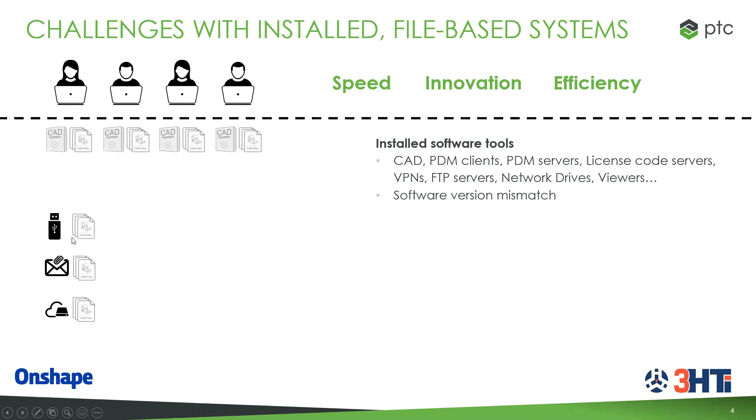So let's talk about these copies of files for a little bit. How do people try to conduct concurrent engineering and concurrent design when working with files? So what they'll do is they'll email files back and forth. They'll use a system like OneDrive or Google Drive or Dropbox to share these files, which is pretty easy, but still there are only copies of files. Only one person at a time can work with these. And they're locked as soon as somebody tries to open the document.

Or with Dropbox, as I've seen, you can end up with a conflicted copy. So you have copies of files and it's uncertain as to which one's the right one. So how do companies deal with this? Well, one of the ways they deal with it is they invest in local file servers. Or they'll invest in a PDM system or a PLM system to manage the rate of change and protect the files from being overwritten improperly. And they'll build in workflows. But what's interesting is that this can create even more copies of files.

So for example, PLM systems can use a check-in and check-out method. And when you check a file out, it is downloaded and copied to your local desktop where you can work on it. But the file in the PLM system is locked in the cloud. Nobody can access it or even view it until you check it back in. But when you check that file back in, you are still going to keep a copy on your computer. Most likely it's going to be in your downloaded files.

And you need to keep that in mind because, say, in 2 weeks or a week or whenever, you have to access that file again and you bring it in to your computer to make changes, you don't want to make the mistake and update the wrong file if somebody else has worked on it. So that can create an issue.

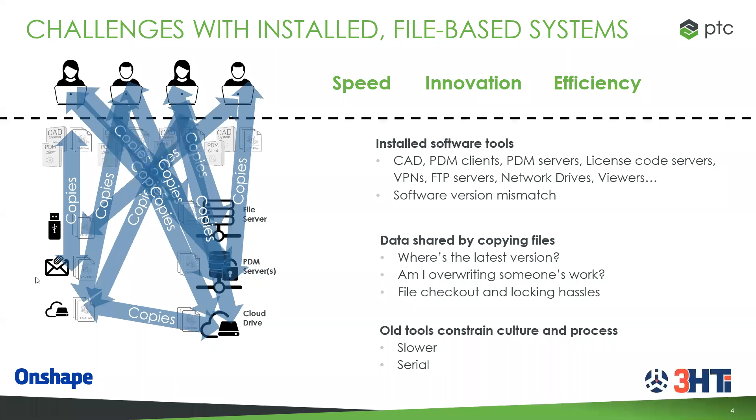The longer it takes for everyone to get the files to the third engineer or the last engineer, not only can that delay the deadline, but if there's an issue, it's going to go all the way back to the beginning, and the file or the product is going to need to be modified, and any change in that process is going to be costly, not just because of additional engineering hours, but lost revenue costs associated with missing deadlines or delays in getting your product out the door. And this metric is called cost of change.

There's another metric called cost of delay, and in that metric, what will happen is you'll find problems later in the design process, and that happens when deadlines are missed and products are delivered late.

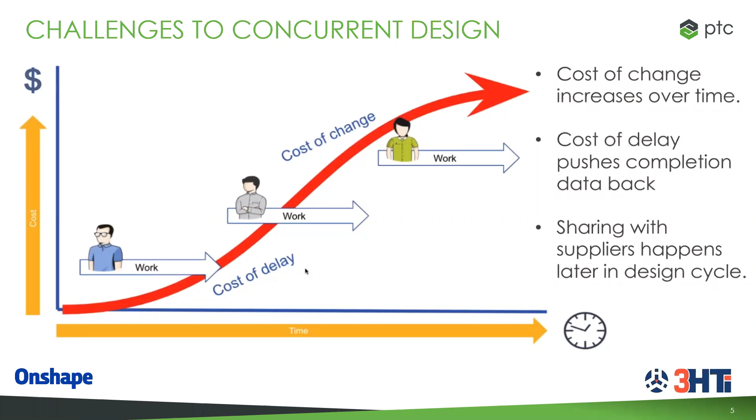The way that Onshape is architected, you'll see everything is in one place. There's never a copy of a file that goes from the server to your hard drive where you have to work on it. Everything is done in the cloud. So this is a database-driven approach where multiple people can be in the same assembly or part at the same time and have safety and control. So Onshape runs in this unified cloud platform known as the Atlas platform. And everything you need for product development is in one place with a database-driven approach where multiple people can be in the same assembly or the same part.

So this is actually a new 3D CAD system. It's a unified solution to solve the problem of passing files back and forth. It's the easiest way to share products and knowledge without having to take it from the cloud or take it from your computer or giving somebody else access. The solution was not building a PLM system in the cloud. Onshape had to create an entirely new CAD system to be able to do this. And this CAD system was building this modern architecture that's supporting concurrent design.

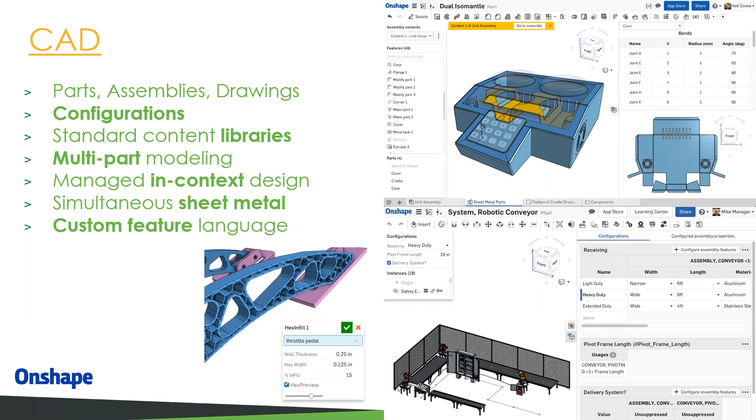Now, because this is a cloud solution unified, we can do many other things that are innovative. For example, like data management. Data management becomes very easy to accomplish for one reason. And also, you're not paying the IT tax to maintain your own servers and keep those servers up to date. So there's no monthly maintenance or anything else that's needed. So you're going to save a lot of costs from an IT standpoint. There's also a lot less data traffic, and files are not passing back and forth.

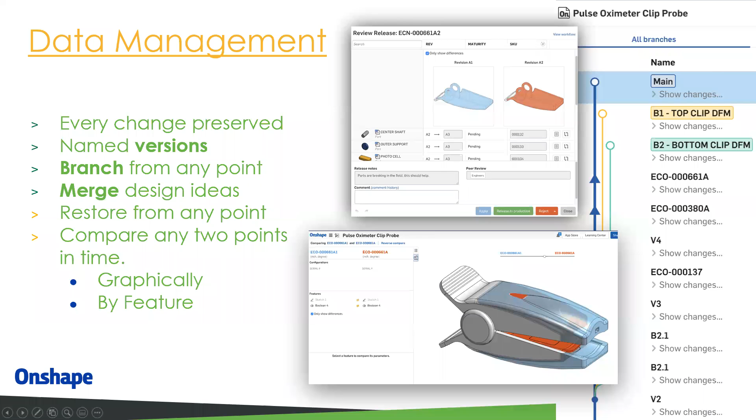So there's many other capabilities that Onshape has, including a bill of materials, task management. We can get into that in more detail if necessary. If you want a customized presentation, we can do that. But understand that a unified cloud solution will allow collaboration in a parallel fashion, and it allows you to work on any device that you want to. So you can work from a Windows-based system, iPhone, iPad, Chromebook, doesn't matter.

Onshape allows one person to use a Windows-based computer and another person to use maybe a Mac-based or an iPhone and access the system or access the files at the same time. And one of the questions that frequently comes up in these webinars is, well, if two people make changes at the same time, how does it record the change? Well, the system will just pick one over the other as far as who made the change before the other person. And as I showed in the previous slide on the right-hand side, you can see exactly who made the change and when.

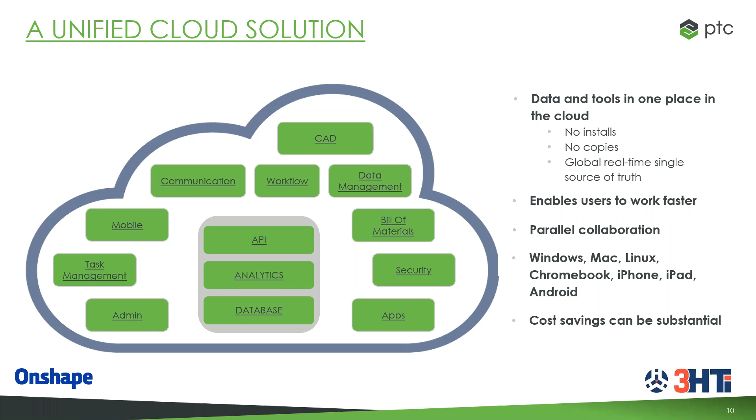So this provides a reduction in infrastructure costs because it's 100% cloud-based technology. So with that, I'm going to stop sharing my screen because I can't pass control because this is not GoToWebinar. But on Zoom, I will allow Bill Stickney to take control and share the screen.

Bill is an industry veteran. He's been with us at 3HTI probably for about, what, 15 years, Bill? Yeah, about that. And long time with Laird Technologies, has seen and used a lot of different CAD systems. He's also an FEA and CFD expert. So Bill's really knowledgeable, and one of the things that we're excited about with Onshape here at 3HTI is because Bill likes it. So that's kind of the litmus test. If Bill likes it and he thinks it's a viable system, then we get excited about it. So Bill, feel free to demo away.

Very good. One other thing I've been known to do is software development. And I can tell you that in the first week or so in computer science school, you learn that the objective of all computer software is to store every piece of information exactly once. So if you change it where it's stored, it changes it everywhere it's used. Parametric modeling kind of does that, but we do have the problem with multiple copies. Onshape takes care of that because it's stored in the cloud system. There is exactly one copy of everything. And if anybody changes it, it changes everywhere for everybody.

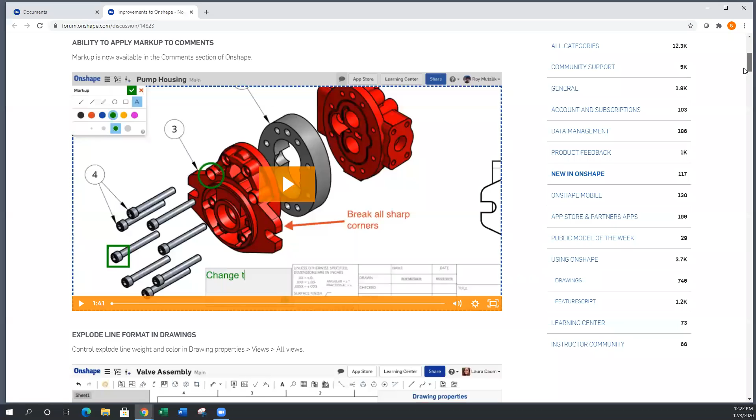So I don't know what they've added. They put these updates in roughly every 3 weeks, and we'll see what they've added here. Well, we got better markup comments, got better explode line formats, something new in section views. As I say, I haven't even seen this yet, so I'm not sure what they got here. Apparently, they've added some capability to the mobile device and so on. I'm not going to go through this in detail. I'm just showing you that they keep updating this, and it's getting better every 3 weeks. And it's already pretty good.

So I'm going to show you some things here. Now understand this is a parametric modeler. So from a user point of view, it has some similarities with Creo, Pro Engineer, SolidWorks, CATIA. They all use history-based parametric modelers, and this does too. So if you're familiar with those products, you won't have too much trouble learning this. But this does some other stuff. I'm going to open this guy here. This is a weldment that I designed. It's just a sample.

And right now I'm looking at a finished product, but what I actually want to look at is the Part Studio here. So a Part Studio allows you to create geometry, and typically solid geometry. It does, by the way, a very nice job with sheet metal also, although we're not going to look at that today.

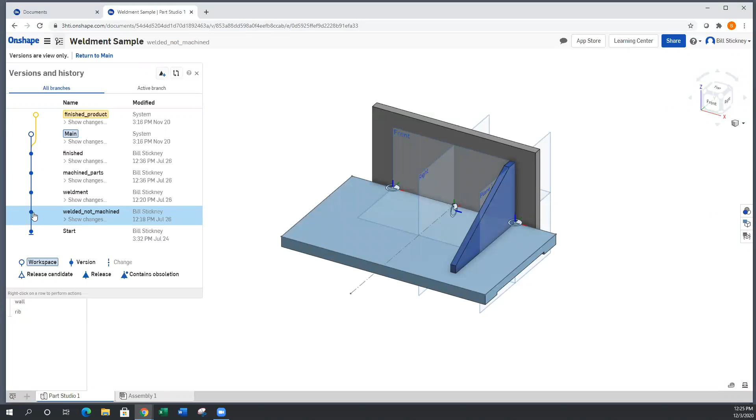So I have a state here for my weldment not machined. And if I were to click on this, it would show up and you see there's no cuts or holes in there. And then after I branched, I put machining operations in, and now I have a finished product that looks like this with all that stuff in it.

So this is not 3D, this is like 4D, because I'm able to show my design in different states or different times, if you will, pseudo time, I guess. So this branching is quite powerful. Another use is just to try different ideas out.

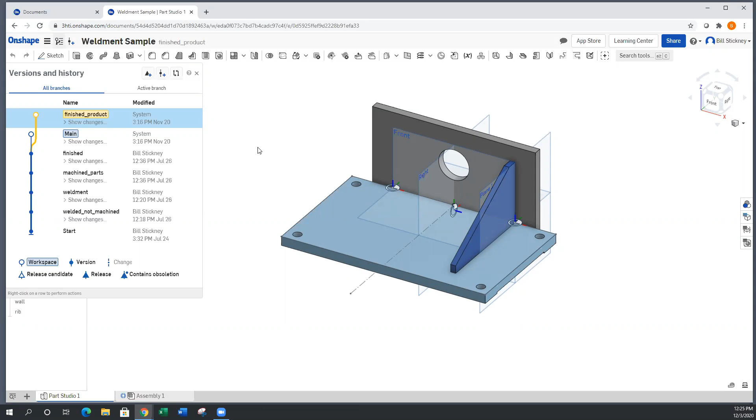You know, I'm just going to add some material over here and put a cut there and then take it down and let the machining guys look at it and see if they like it. And if they don't, I'll try something different. And you can keep doing that pretty much as long as you want. So that's one of the very powerful capabilities of Onshape.

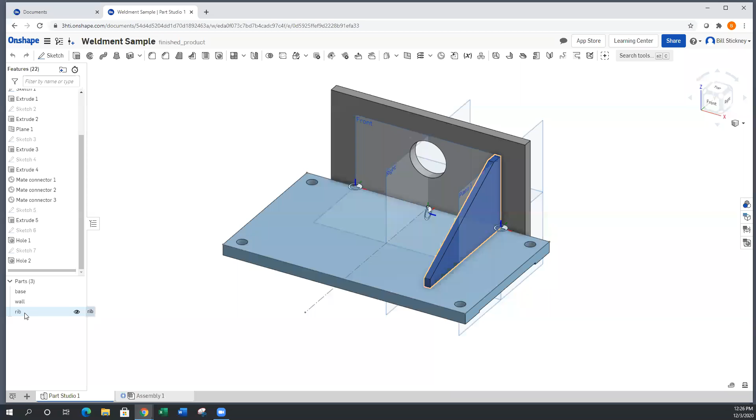And when you go to the assembly, see this is not an assembly at this stage. These are parts. They happen to be in the same space and they can be related to each other, but they're actually not assembled. What I did do here though is, for example, I'll hide these parts here. Here's my rib part. So you can work on these parts kind of separately by hiding the ones you're not interested in at the moment.

What you'll note here also is there's a little symbol down here. That is called a mate connector. And I have the option of defining these in the part creation, which is done here. And then those are used to assemble parts together. They're basically coordinate systems. But what they allow you to do is when you go into an assembly, you can just snap stuff together. It is very, very reliable.

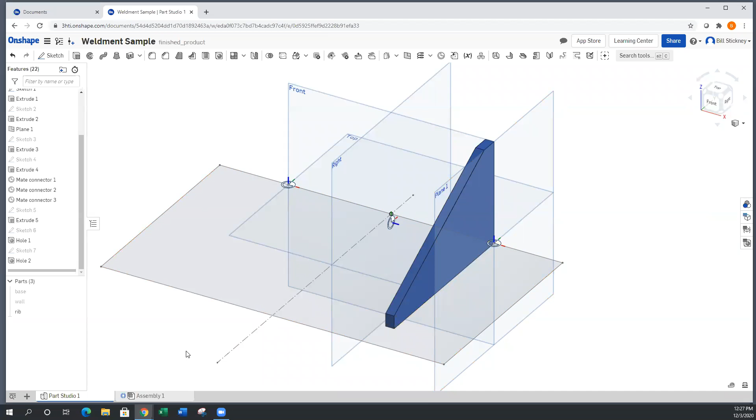And this is a problem that we understand is a big problem in SolidWorks, is that their assemblies are difficult and not terribly reliable. But these are very reliable because of this mate connector business. So I'll show you the assembly here. Here's my assembly. And I brought these things in and just snapped them together like Lego bricks, basically.

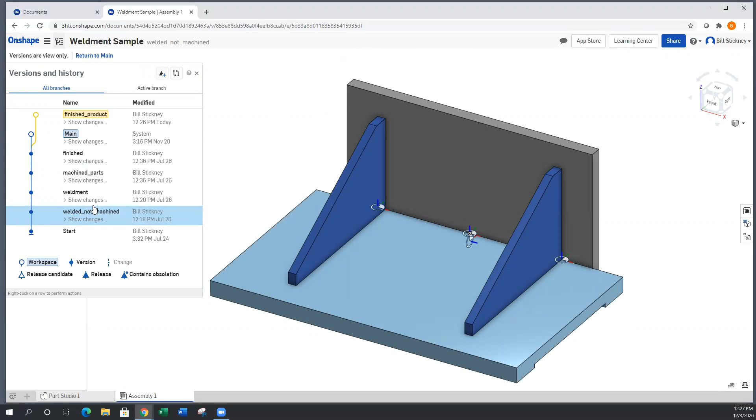And this also, if I believe I have this set right, yeah. Let's try this. All right, so there is the assembled weldment with no machining part cuts, and then here's the finished product up here. So I was able to carry that through to the assembly level as well. So you can have assemblies in different states. Quite a powerful thing, actually.

Would also point out that in the assembly process, in addition to using mate connections, you can also use them where they are partially constrained, so we can have mechanisms. So we could, for example, have things that are rotating or translating, sliding axially, pivoting about a ball, that sort of thing. So we have full functionality on that kind of stuff.

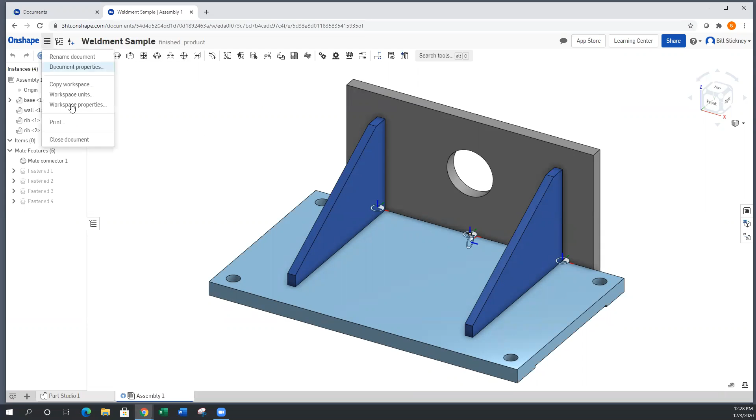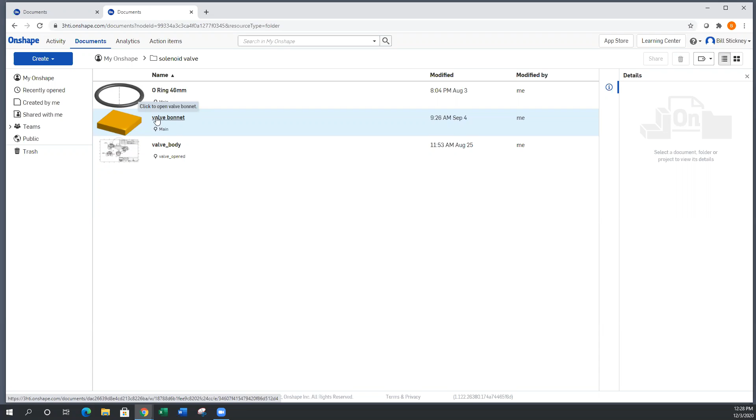All right, so let's move on to something else. I want to close this now. And I want to show you another technique that we can use for... okay, it's in here, I think. Yes, let's grab this guy here. This is part of a solenoid valve. This would be like the top of the solenoid valve.

That doesn't look very good. Let's do this, we'll go over here and look at the casting.

So I made this casting model. This happens to be the only one in this Part Studio. Typically you're going to have more than one part, but you could have one. Depends on how your data is organized.

So the intent here was I wanted this to represent a raw casting, so this might be a sand casting and possibly a die casting, I'm not sure. The parting edge is right here, so we have a core and a top.

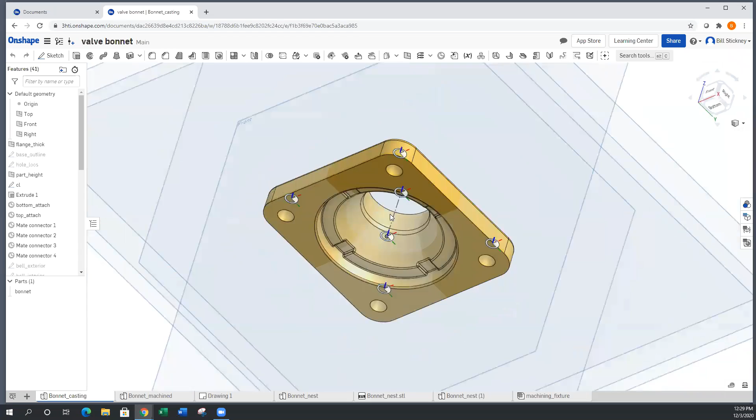And you'll note that I have added mate connectors out here where the bolts go, and other mate connectors on the bottom and top where the mating parts go, because they're consistently in the same location. So this makes it pretty easy when you go to do the assembly.

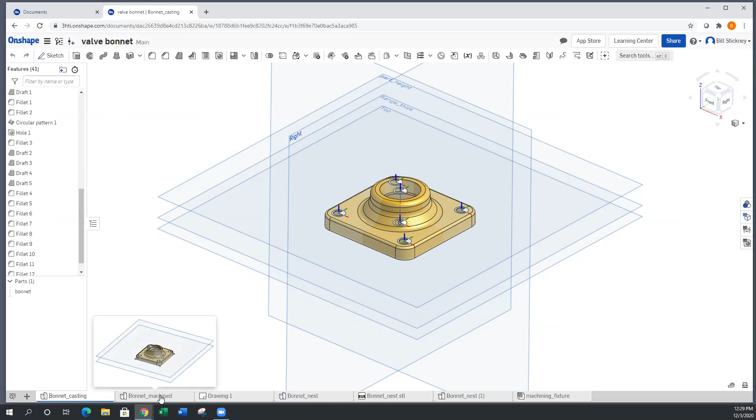But what's interesting here is I took this and used a different technique. This is using a technique which is, well, it is technically inheritance, although I don't think it's actually called that. No, that's not it, not important. What I did here was I inherited this casting right here.

Derived is the term they use in Onshape. So this is derived from the casting model. So I now have a copy of that. This does not have a model tree at this point, but now I'm going to add additional features to it.

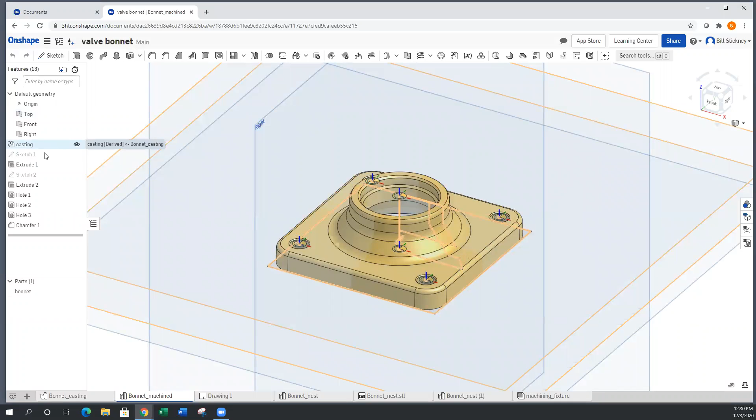So I've gone in here and I have drilled holes, or probably bored them out. They may have been cast. Machined the bottom here, put threads in up here, and I now have a fully machined part, and this can now be released to manufacturing.

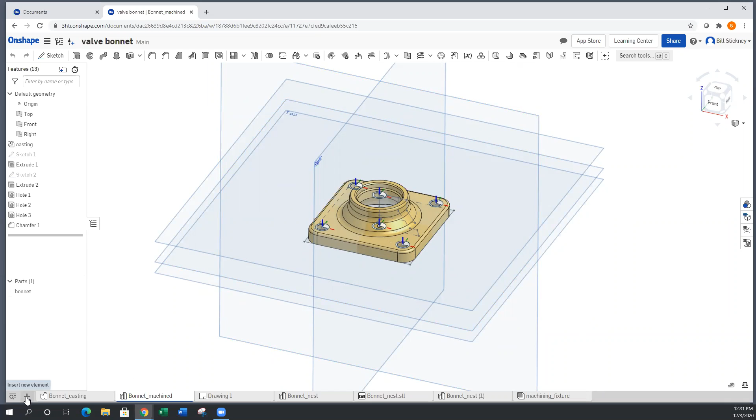Now, of course, you can make drawings of all this stuff. You could make a drawing of this real quick here, I'll show you how that works. You insert a new element. Element in this case would be a drawing.

And let's see, I guess we'll use that one. This was designed in inches. I think that's good.

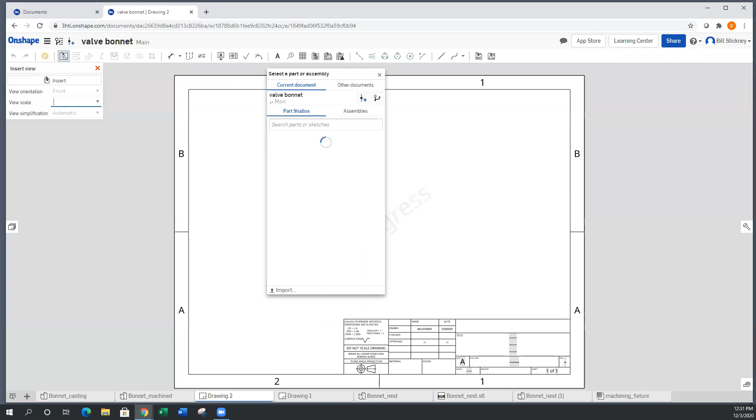So I now created a new drawing, and I have to go out and grab something to put in the drawing. So here is my machined bonnet right here, and that's what we're going to add to the drawing.

So now I can put in a view. So here's a view, and I could project more views off of that. I could come up here and project a view.

You can cut cross sections in these too if you want. Let me try that, try a section view. And I think we would do it like this. Nope, I'm sorry, that's not it, that's for a broken out section. That's not what I was trying to do.

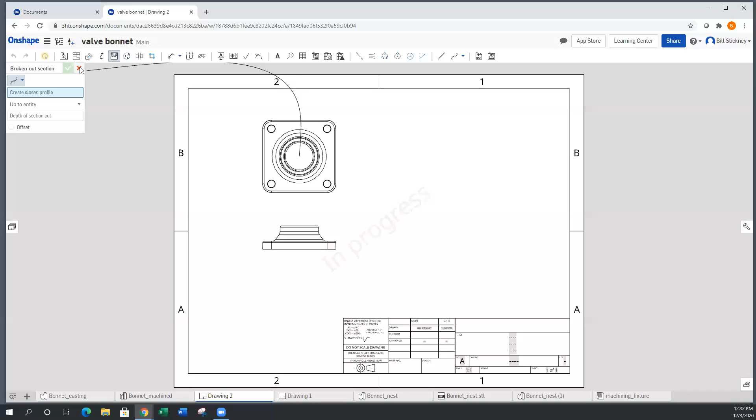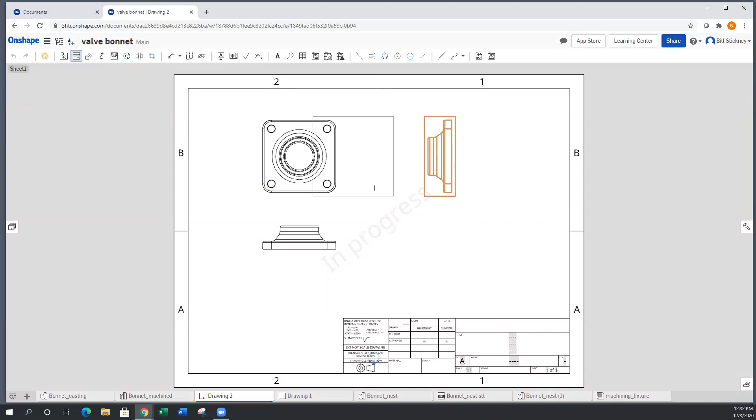Don't want to belabor this, but suffice it to say, in this process here, we'll try projecting a view, and in this case here, I will see if I can put a section in it. All right, well, that's... there's a non-projected view. That's kind of neat.

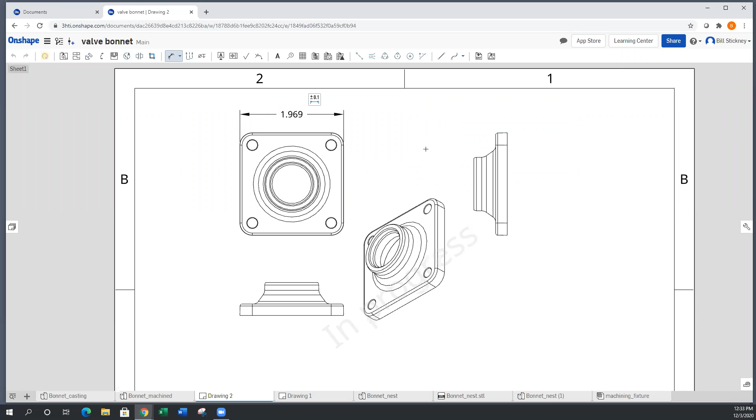Anyway, you can add dimensions to all these and make full drawings. Dimensions would be something like this. Come in here - dimensions are actually not captured from the solid model, you would add them here. And there we go, we got our drawing.

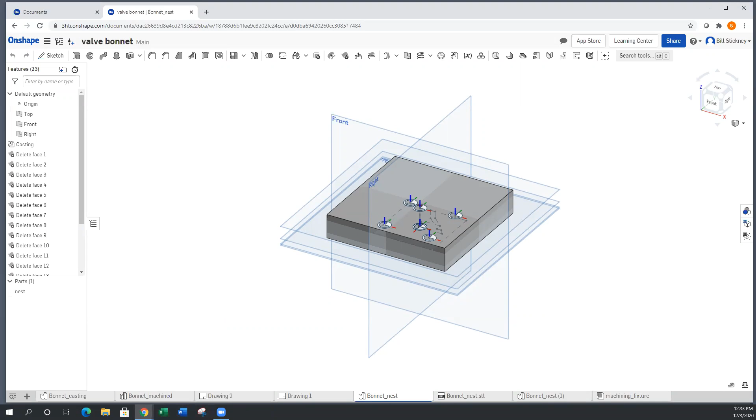All right, so I want to go back and show you another aspect of this too, and this is kind of neat here. I took my bonnet part here and made a variation on it, which is that one. No, it's this one here.

What I did was I took my bonnet and I made a version of it. It's hidden right there, that's why we're not seeing it. There we go. So I made a version of this where I plugged up a bunch of holes.

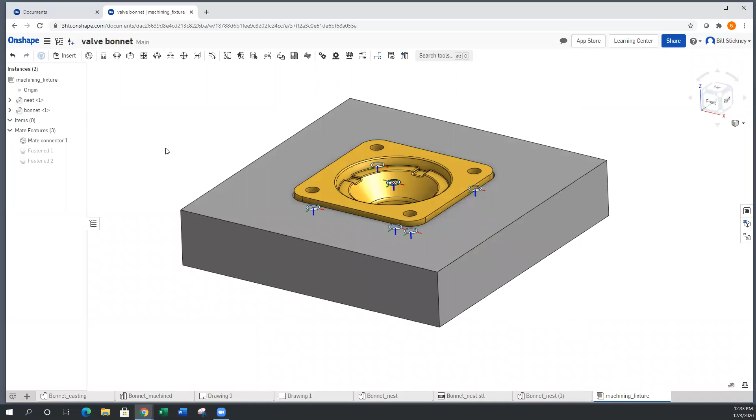And then inserted it in this nest block and then did a Boolean operation to subtract material with clearance. So now I have taken my machined part and converted it into a nest.

And in this case, this nest might be used for machining. So we would take this thing and plug it in here, and it would hold it in position while we go in and then add our cuts on the bottom and our holes or whatever we need to do.

This is actually done frequently on very complicated parts with organic shapes where we just don't have anything you really can grab a hold of easily. So that's one of the techniques here, and this was done with the inheritance operation or the derive.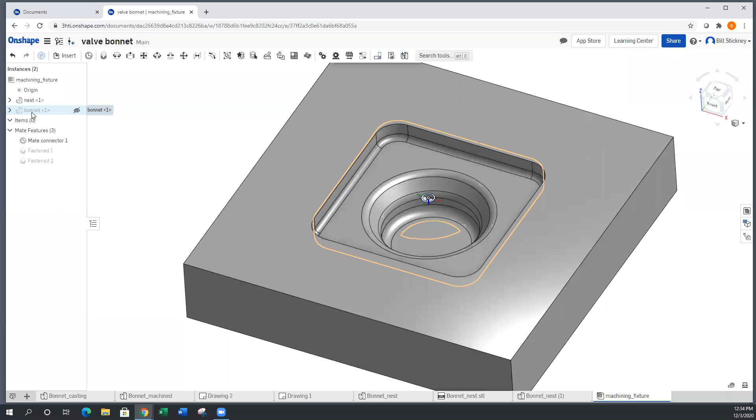Okay, so we're good with that. Let's move on to something different here. I'll close that guy, and we could go to an assembly. So I'm going to go into my valve body here, and we'll show a little bit of assembly. So this is the bottom half of that same valve.

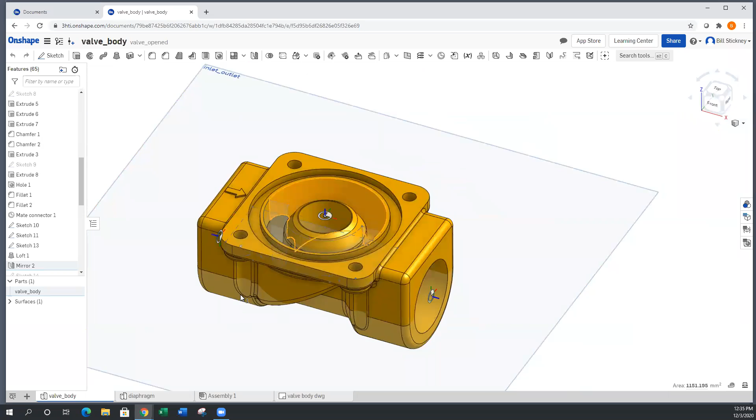And this was made out of a casting also. Interestingly here, you'll see that on the inside, we have some fairly complicated geometry. We have this groove that kind of spirals downward and gets deeper as you go. We also have the slanted bottom here. So this is starting to get a little complex.

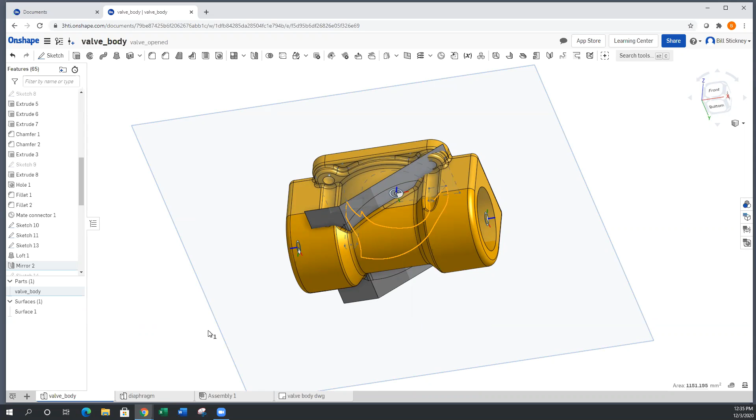But Onshape was able to handle this pretty well. They've got a fairly good library of solid tools. One of the things they do have is the ability to create surfaces. This is a reference surface here, so we'll turn that off. You see here what I did was I created that surface and then extruded up to it, so it is a depth reference for the extrusion. Then I can hide it later. So you can use all kinds of curves and surfaces for construction.

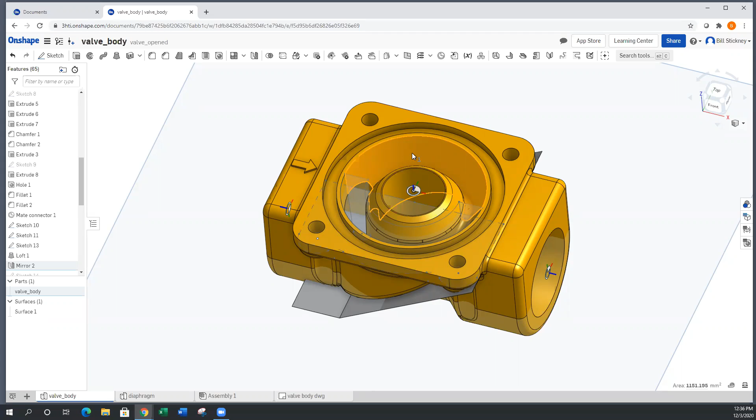It works nicely. The inside cut here was done with a Loft feature. That is, in other tools, that would be called probably a swept blend or perhaps a blend. I think it may be also called a Loft in some tools. But it allows you to transition from one cross-section to another following a path. In this case, it was a circular path.

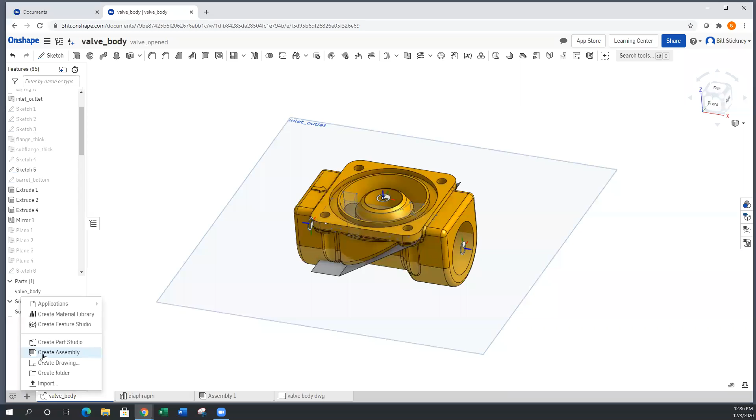So fairly powerful stuff. But let's make an assembly out of this. This would be more interesting. So we'll go in and create a new assembly. And my first item will be the valve body. So we assemble that.

And if I want it to be in a particular location, I can do this. Right now it's just floating in there, but this fastens it. So I can go from this mate connector to the center of the part here, and that should locate it or lock it in. All right, well, that's not doing quite what I expected. That's not important though, but let's assemble the next part in here.

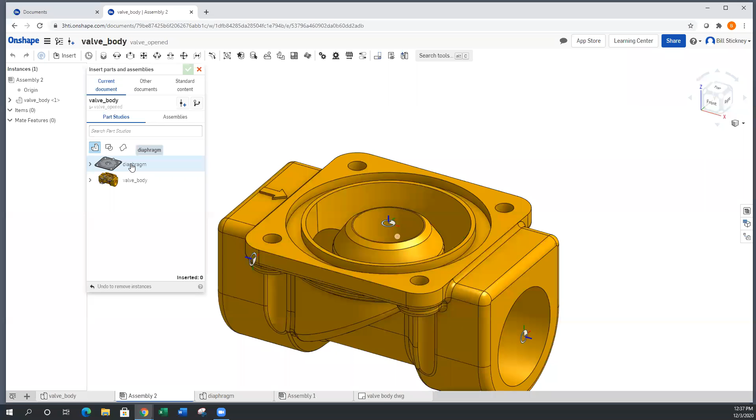We'll do an insert. Now, in this case, I want a gasket. The gasket is in a different document, I believe. Now let's do the diaphragm. That's already here. So we'll grab this guy here and assemble it. So I can just park it in there for now.

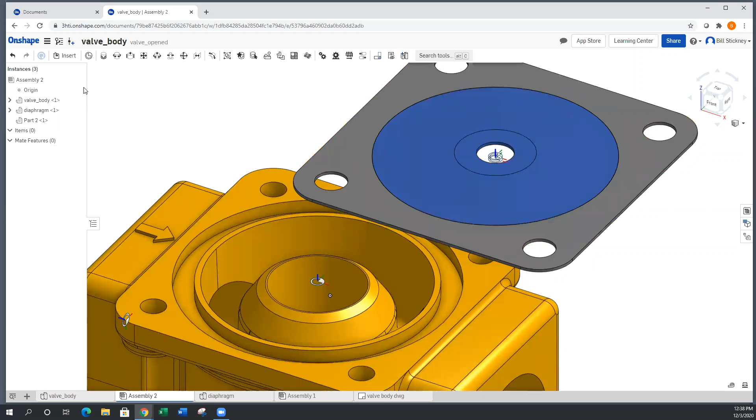Now, this would be a nuisance to assemble in some tools because you would have to go in and start picking cylinders and planes and things like that. But I have pre-made mate connectors here. So when I go to assemble this, what I've got to do is grab that mate connector and this mate connector, and that should assemble it. And it's done. Looks like the center of it got loose. I'm not sure why that is, but the point here is that you can assemble these things pretty easily.

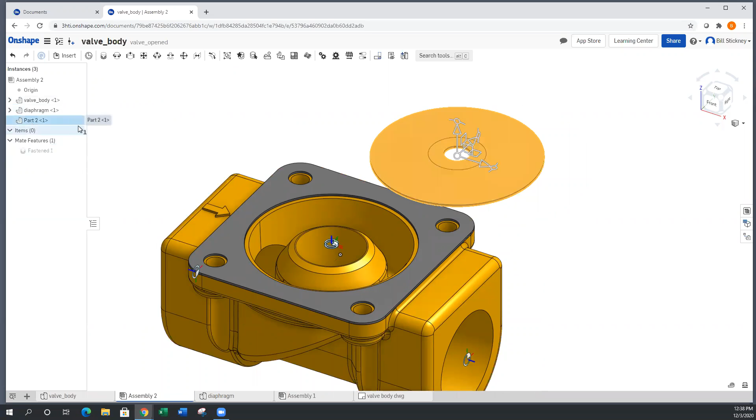All right, I'll tell you what, we won't worry about that part. Let's just hide that for now. Haven't worked on these models lately. All right, so we could do another assembly. Let's go in here and we'll insert from a different document.

Recently opened. Here's my valve bonnet. This goes on the top. And we want the machined version for this. So here is my bonnet machined. Should be that guy, I think. All right, so we brought that in.

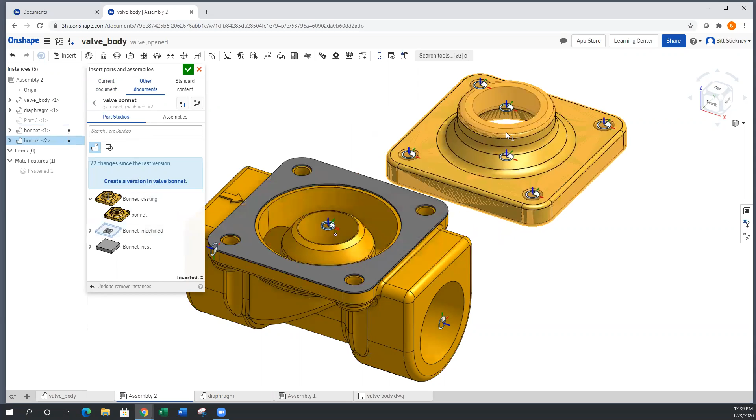And now we do the same thing again with the mate connectors. We grab this guy here, grab a mate connector there, and a mate connector here. In this case, it's the top of the gasket, and it's done.

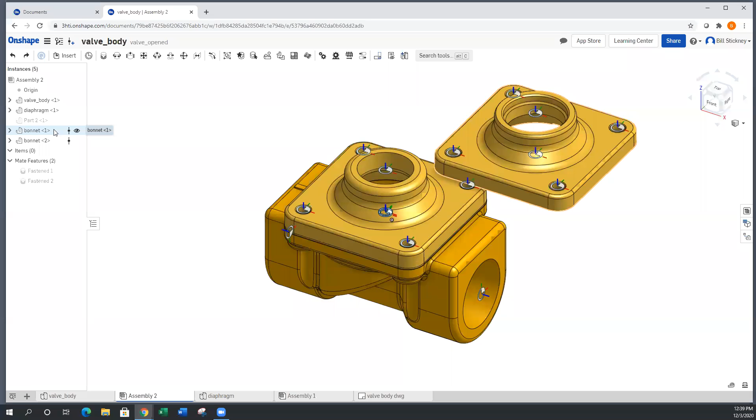Looks like we got two bonnets. We'll get rid of one of them. Down there at the bottom. Oh, wrong one. That's okay, I got an undo button. So we'll just hide this one for now. I love undo buttons. Yeah, it actually works good here.

And this is interesting. In Onshape, the history—I guess this is the history here. Nope, that's not it, that's a version control. Yeah, this is the history here. It shows a lot of detail. So see right here, here's all the stuff we just did. So it's not quite every keystroke, but it's pretty much every time you click on the checkbox, it records what you did, and it keeps this forever, basically. So you can go back and you can undo stuff, back till weeks earlier, possibly. And interesting, yeah.

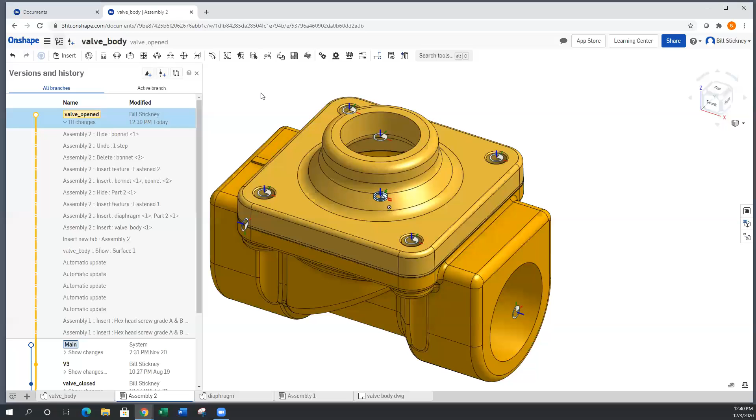And you can also save versions, which I did here, and let me show you that again. See, I have a version here where my valve is closed, and then I have another one here where the valve is open. That was done with a family table.

Again, using this time element to show my design in different states. The nice thing with these connectors is when I go to put bolts in here, I just snap them in—it's like putting Lego bricks together. The only thing you have to do is create these mate connectors where you know you'll need them. Or, with simple shapes like cylinders and squares, it will create mate connectors on the fly.

The nice thing is they're extremely reliable because they're based on whatever geometry you referenced them to when they were created, and they don't change. Things don't get away from you in one simple operation and you're assembled. I rather like that aspect of Onshape. Did a nice job there.

Anyway, so I've shown drawings, assemblies, and branching. I don't think we need to show a whole lot else right now, Rob. I think we're getting about out of time.

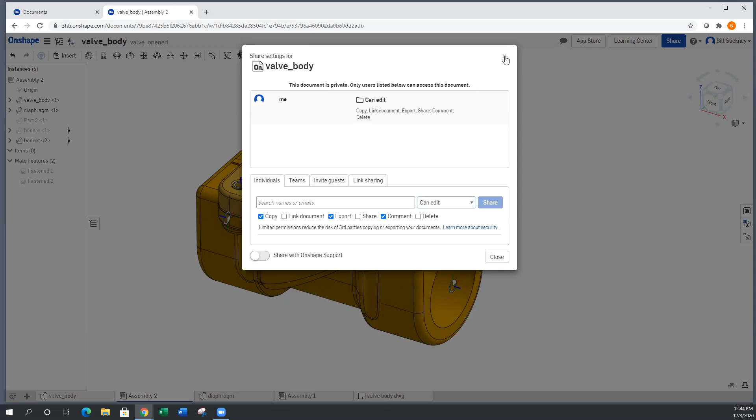That's rather nice. Other tools require you, in some cases, to load special viewing programs, things like that. This does not require it—you can open it on almost anything you own.

No need to convert it to a step file or a neutral file. You don't want to do that because it breaks associativity. I mean, you can do it if you need to send it to a printer and have to have a step file—you can bring objects in like that—but to maintain associativity, you don't want to do that unless you have to.

Yeah, SolidWorks is notorious for losing data when their files have to be converted or translated.